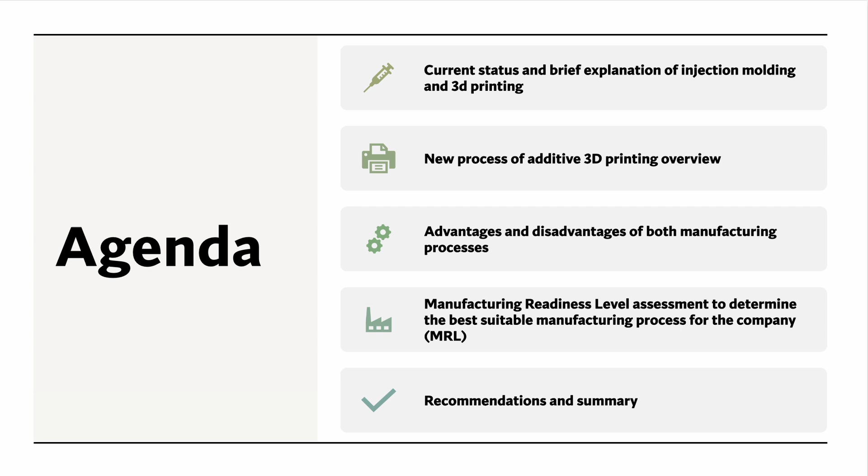Now, what is injection molding? Injection molding is a process where melted plastic is injected into a mold under high pressure to form a specific shape. Once cooled and hardened, that part is ejected. It is a fast, precise method to use for mass production items ranging from toys even to automotive parts.

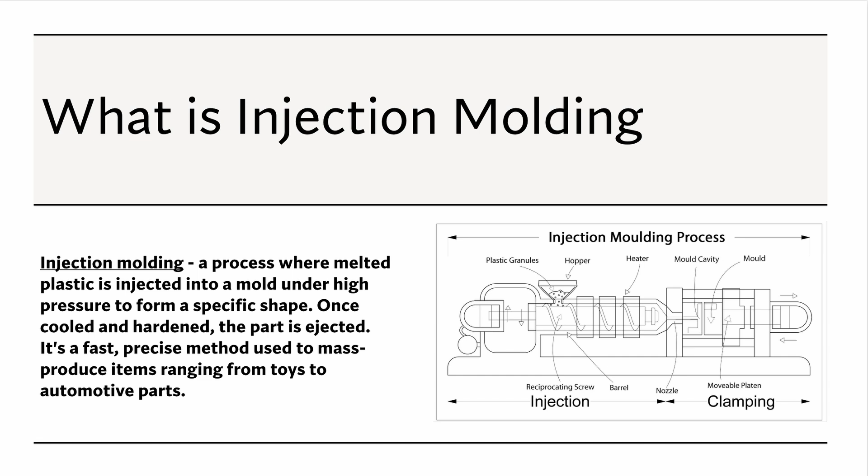The image on the right shows plastic granules loading into a hopper, then going through a heater, then injected into a mold cavity, which is then clamped together, and the output is your injection molded part.

3D printing, on the other hand, is a process where material is added layer by layer to create a 3D object from a digital design. It is used to make custom parts and prototypes, offering flexibility and the ability to create complex shapes.

The image on the right shows filament being loaded into the extruder. The extruder is then able to control the amount of filament precisely. The system moves the extruder head to be in position for printing the next layer. The hot end melts the filament to be in a fluid state. The object is then constructed layer by layer on top of the heat bed.

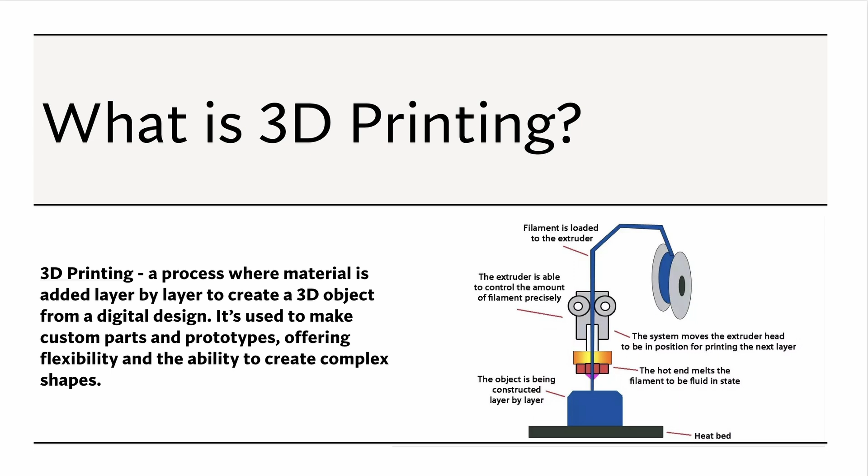After a little overview of injection molding and 3D printing, here are a few of our company goals. A couple of the goals include investing in a manufacturing expansion of the company, producing high quality products, and providing efficient all-around production for our company.

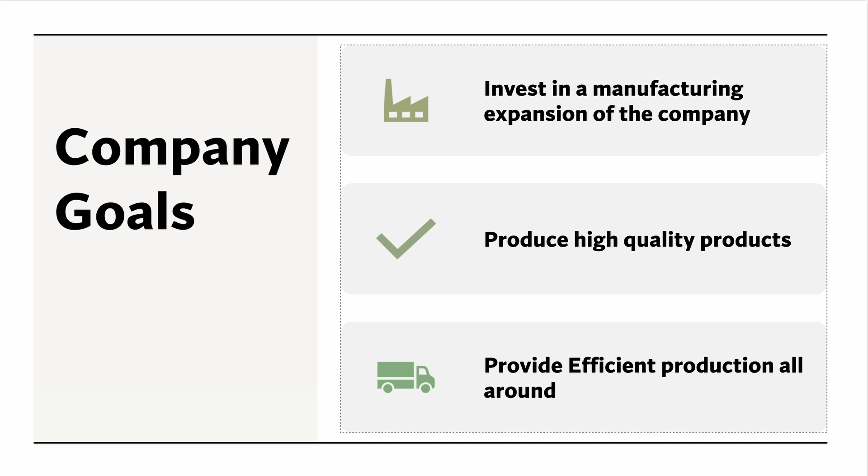When comparing and contrasting injection molding versus 3D printing, they both have their pros and cons. For injection molding, the pros include high production speed. Injection molding allows for rapid production of larger quantities, perfect for higher volume needs. Consistency and precision. Each part is made to exact specifications, ensuring uniformity and tight tolerances.

It can produce complex shapes, capable of molding intricate and complex designs that are hard to achieve with other methods. Low cost per unit. Once the mold is created, the cost per part is significantly reduced, making it cost-effective for large runs. Larger material variety offers a wide range of materials, including plastics, metals, and different options for product needs.

Minimal waste. The process generates very little waste, and excess material can often be reused. Strong, durable parts: it produces robust, long-lasting parts suitable for functional and high-performance applications. And then lastly, we have low labor costs. The process is highly automated, reducing manual labor and keeping costs down.

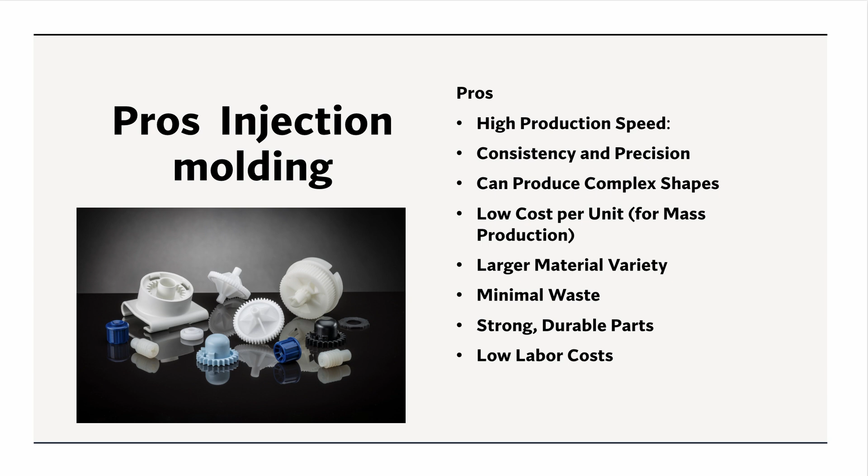Moving on to the cons of injection molding. High initial cost. The upfront cost of creating molds and setting up machinery can be expensive. Limited flexibility with new designs. Once a mold is created, making design changes can be time-consuming and costly. Complex setup. The process requires detailed preparation and setup, which can take time and expertise.

Design limitations. Certain design features like undercuts or complex geometries can be challenging or impossible to mold. Not ideal for small volume production; injection molding becomes cost-effective only when producing in large quantities. Long lead time for tooling. Creating and testing molds can take weeks or even months, delaying production.

Design limitations for larger parts. There are practical size limitations on the parts that can be molded, especially for very large items. Material restrictions. Not all materials are suitable for injection molding, limiting material choices for some products. Shrinkage and warping. Parts may experience slight shrinkage or warping during cooling, affecting precision and fit.

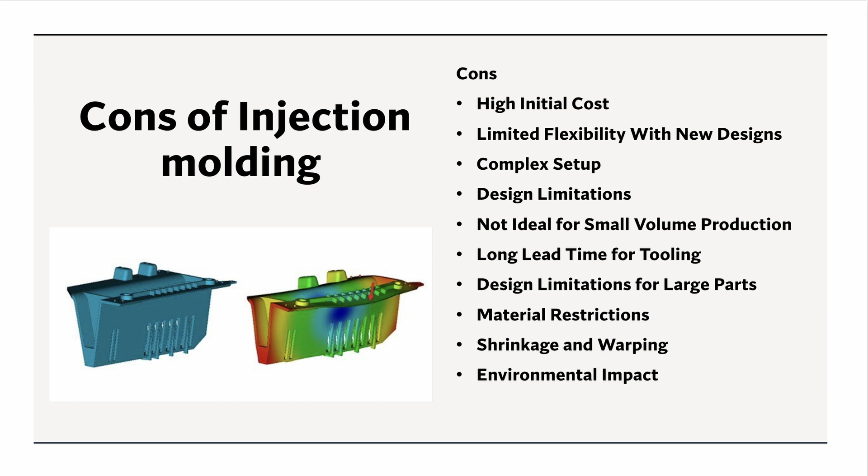Environmental impact. Injection molding can generate waste, and the use of certain plastics may not be environmentally friendly. Moving on to 3D printing.

The pros for 3D printing include design freedom. 3D printing allows for highly intricate and complex designs that would be difficult or nearly impossible with other methods. Customization. Each part can be customized easily, making it ideal for unique parts.

Low setup costs. There's no need for expensive molds or tooling, besides the machinery or the equipment used to actually make the 3D prints, making it affordable for small runs or prototypes. Rapid prototyping. You can quickly turn designs into physical parts, speeding up the iteration process.

On-demand production. Parts can be printed as needed, reducing inventory and storage costs. Material flexibility: a wide range of materials, including plastics, metals, and composites, can be used, providing flexibility for various applications. Reduced waste: 3D printing creates parts layer by layer, minimizing material waste compared to traditional subtractive methods.

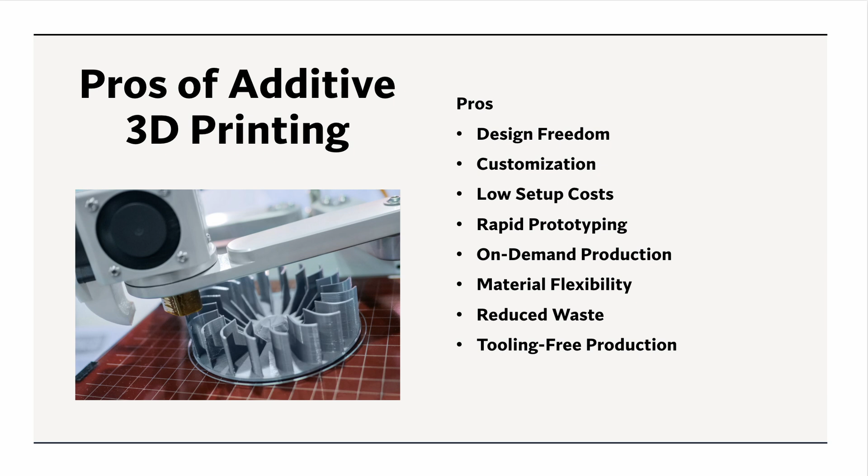Tooling-free production: there's no need for molds or special tools, making it simpler and faster to create new designs or prototypes. Moving on to the cons of 3D printing, which come with a slower production speed. 3D printing is slower compared to traditional methods. Moving on to material limitations. 3D printing materials are often more limited in performance and selection compared to traditional manufacturing, like injection molding.

Surface finish: parts may require additional finishing to achieve a smooth, high-quality surface. Size constraints: 3D printers have size limits, which can restrict the production of larger parts. Limited strength: 3D printed parts may not have the same strength or durability as those made with traditional methods like injection molding.

Post-processing requirements: many 3D printed parts require additional steps like cleaning, curing, or removing supports, adding time and cost to the process. High cost for larger volumes: 3D printing remains expensive per unit for high volume production, making it less cost effective than injection molding. Printer maintenance: 3D printers require regular maintenance, and repair costs can add up over time.

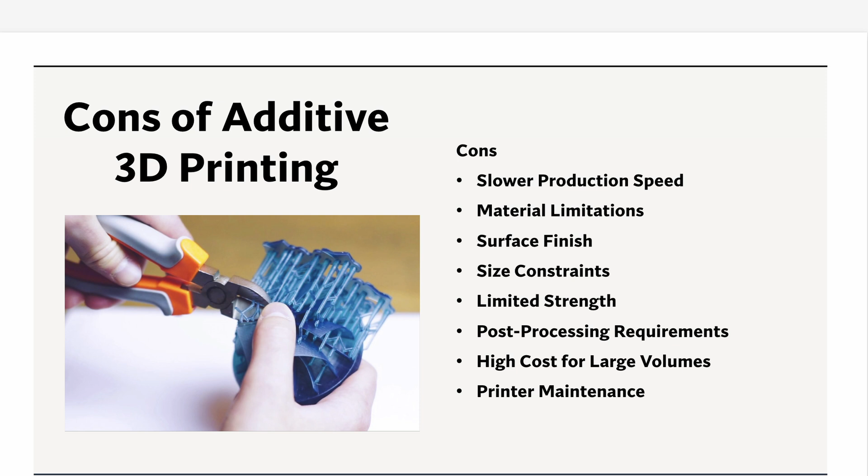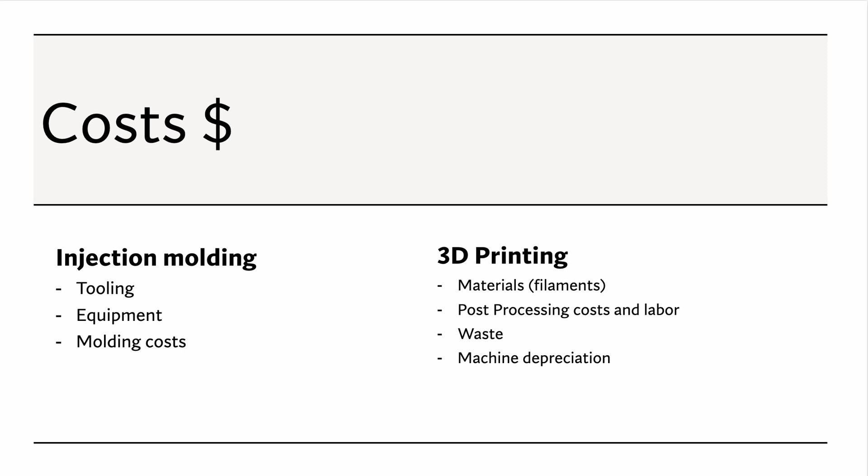Moving on to costs for both of these manufacturing methods. For injection molding, the larger costs seem to be tooling, equipment, and molding costs. Now for 3D printing, the larger costs include materials like the filaments, post-processing costs, and labor for those post-processes, waste, and machine depreciation. Next, I'll talk about the manufacturing readiness levels for each of these manufacturing processes.

Injection molding is considered to be at a manufacturing readiness level of 9, at a full rate of production. This is because injection molding is known to be a well-established, widely used, and highly optimized manufacturing process used for mass production. There are many factors that place injection molding at an MRL of 9, which include technology, full-scale production, optimization and automation capabilities, stable supply chains, and proven reliability.

3D printing, on the other hand, is considered to be at a manufacturing readiness level of 7. The MRL can vary depending on the type of 3D printing, the materials used, and the complexity of the products created. Some of the factors that place 3D printing in this range are advanced technology, low volume production, material advancements, process optimization, prototype to production, and post-processing needs.

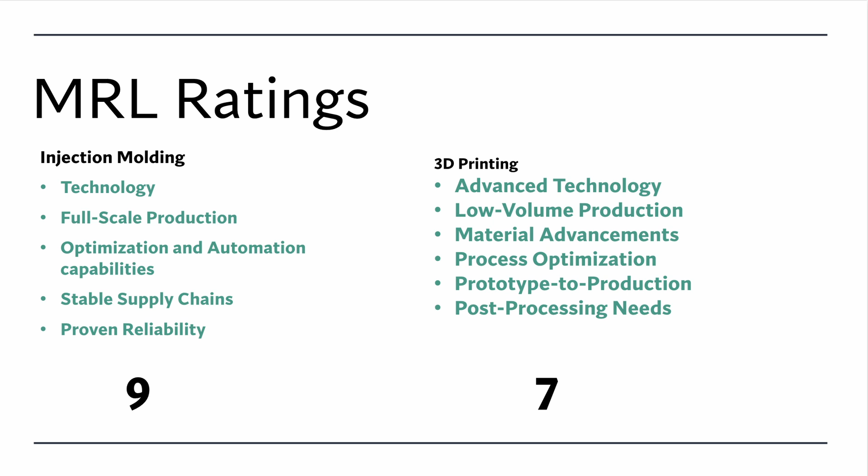In conclusion, my recommendation for our company's needs is injection molding. The reason is it's more cost effective for producing a larger volume of product. With an MRL of 9, injection molding is a highly mature and reliable process that's proven to work efficiently at scale.

Once we have the mold set up, the cost per part drops significantly, and thousands or even millions of parts can be produced quickly, with great consistency and durability. On the other hand, 3D printing is better for small batches or prototypes, but it's slower and more expensive when you need to make a larger volume of product.